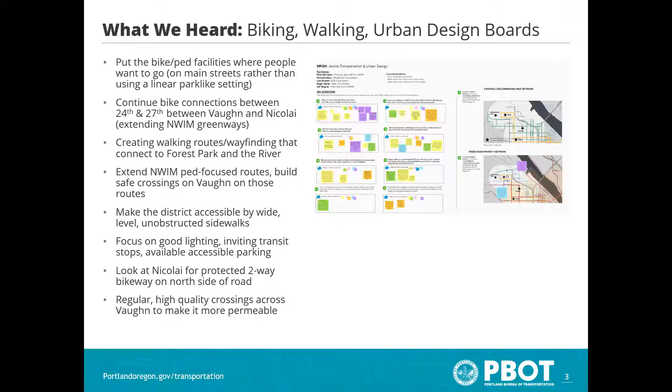So first, going back to the charrette in December - for those that attended, we asked some overarching questions, and then we had boards with the ability to comment on maps and all of that. We broke them up into different discussion groups, and the first one was about biking, walking, and urban design within the district.

Some of the overarching things we talked about and heard from those who attended about the bike-ped facilities is putting them where people want to go. So there was some talk about, should we have a Roosevelt that's kind of park-like, you know, separated where bikes and peds go?

And what we heard more is that people really want to be on main streets and access the uses there, rather than being tucked back in a separated setting.

Another thing we heard was the need to continue bike connections, extending the NWIM greenways. That's like 24th and 27th, identified in the Northwest in Motion Plan, making sure those continue up through the district as the main portals, particularly for bikes between Vaughn and Nicolai.

We heard a bit about creating walking routes and wayfinding that connect Forest Park and the river, an important element for people who live in the district, permeating between these two resources. We also heard about extending the NWIM pedestrian-focused routes and making sure we build safe crossings on Vaughn, particularly where peds are likely to enter the district.

We know that a lot of peds probably won't choose to cross Vaughn at 23rd because of the freeway portals. So if people are really walking up to 24th, 25th, or 27th, we need to make sure that's where we focus on better crossings where the peds will be circulating.

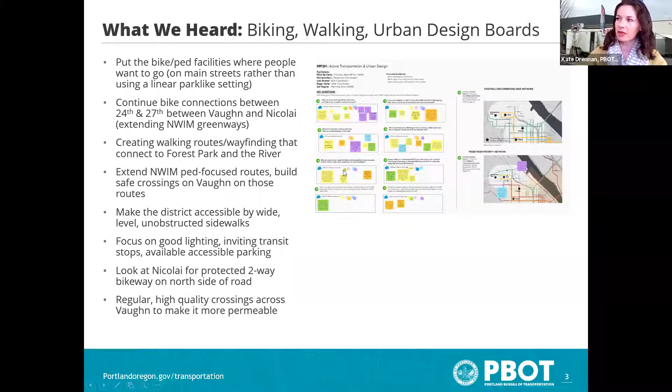These images are just some snapshots of the board from that day. We also had each group go into a discussion and then switch places.

And so we had a sub-chat about transit and vehicle flows. Some of the things we heard from you all were about making sure we incorporate TriMet's planned future services that are in their service enhancement plan.

Related to that, there isn't transit service down in the Squish right now, so we need to talk about that as part of this project. There were also some ideas about moving line 77 to Thurman to avoid the 23rd and Vaughn intersection.

There was discussion about the importance of integrating transit stops and end stations into the adjacent development, making them more placemaking rather than standalone, indefensible spaces that become a no man's land area.

We saw comments about wanting to see the streetcar parked on Wilson, with two-way connections and programming at Montgomery Park, again incorporating into the land uses in that area.

We talked about freight and how to encourage it not to use Vaughn, and instead try to get freight to use Nicolai and the on-ramps on Highway 30, and how we could better encourage that.

This relates to both transit and vehicle flow—23rd and Vaughn is a really tricky intersection. We have a lot of thoughts we'll get into about how to solve that, but some of the things we heard were exploring transit-only lanes or movements around 23rd and Vaughn, both northbound and southbound, exploring what it would look like if we took away vehicle movements in those areas and made them transit only.

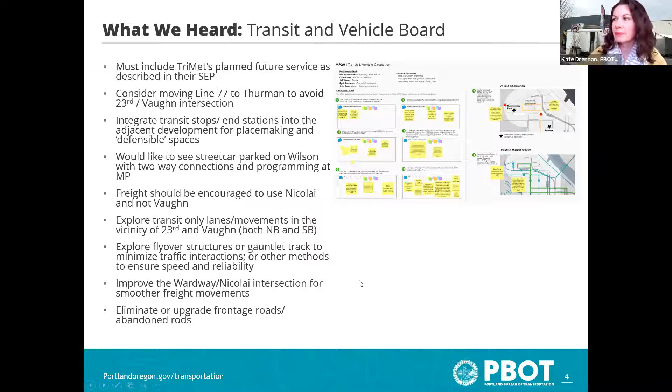With that said, I'm going to go through some of the slides on how we're thinking about each of these flows and portals. Like I said, we'll look at a slide, a map, and then the next slide we'll talk about some of the stickier issues related to each of these.

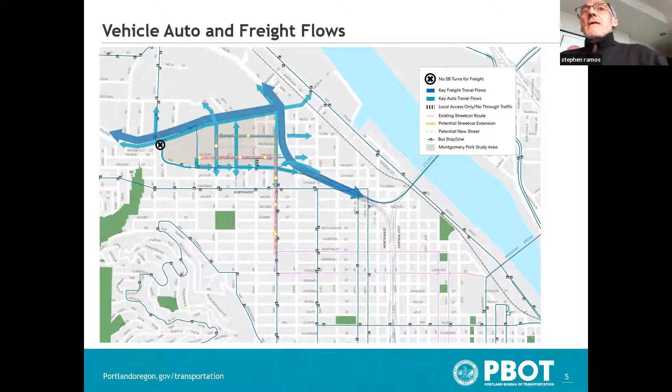My other point is kind of an overall point to Kate's presentation, and I apologize, I missed the very, very introduction. But my takeaway from this is that the overall issue we've been looking at is the congestion and constriction at the 23rd and Vaughn intersection, even before introduction of the streetcar. Then the introduction of the streetcar raised that to a higher priority, obviously.

And the responses, I think properly characterized them as interventions, essentially say, well, I hate to phrase it this way, but we were asked to look at what's the impact of the development and adding the streetcar to this intersection. And the responses are basically, well, get everything else out of the way — get the trucks and cars out of the way of the streetcar. And I'm not sure that's a very realistic response.

So I find it a little problematic because I don't think it actually solves the problem. Again, the cars and vehicles and trucks aren't just going to disappear — they don't evaporate. So those are my two points, one specific and one broad.

Thanks. I see Alex has her hand up as well. Yeah, thank you. I just kind of want to agree with what was said earlier.

I would be really interested in seeing the modeling and then thinking further ahead what mitigations might need to be done in the neighborhood. I know you're aware there'll be some work coming down the pipeline for Northwest in Motion, but how might things need to be changed? How might monitoring and evaluation be impacted by some of that?

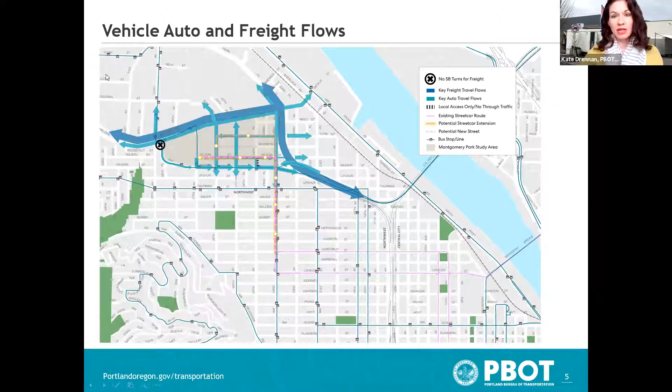Okay, I'm going to keep moving to our next slides so we can try to stay on time. Again, we can talk more about this.

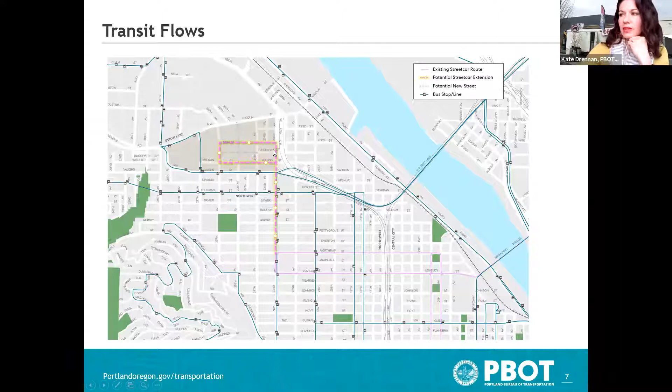With the comment board. So the transit flows, this is just really showing our existing bus lines as they operate. You can see that, as was brought up in the charrette, there aren't really any in the squish right now, and other than on 27th, most of the transit currently operates outside of the district. Then the streetcar, as we've mentioned, we're envisioning on Wilson and York, forming this loop. So some of the sticky issues we're thinking about for transit, a big one being the streetcar alignment within the ESCO site.

So we've been showing this York Wilson 26th Avenue loop as the best operationally. We heard in the charrette an interest in parking in front of Montgomery Park and integrating with the programming there. So something like potentially a loop with a tail track that goes up Wilson to 27th, or we saw comments with interest in a two-way in and out on Wilson.

These are all things we've done some initial streetcar engineering work on to see what's feasible. Some are more feasible than others in terms of cost and utilities, and some have more reliability issues than others, but it's something we're still exploring, along with modeling how these different alignments within ESCO or Montgomery Park area would impact traffic circulation and bike circulation in terms of limited right of way. So these are things we're looking into.

This new, or complementary, bus service plan for MP and ESCO gets to that comment we heard about integrating with TriMet's service area or service enhancement plan. Ideas like: do we continue line 77 on Northwest Thurman up further? Do we keep line 15 internal or external to the site? Do we want more overlap within the district, or more complementary service outside of it? Identifying future recommended bus lines into the squish is another issue.

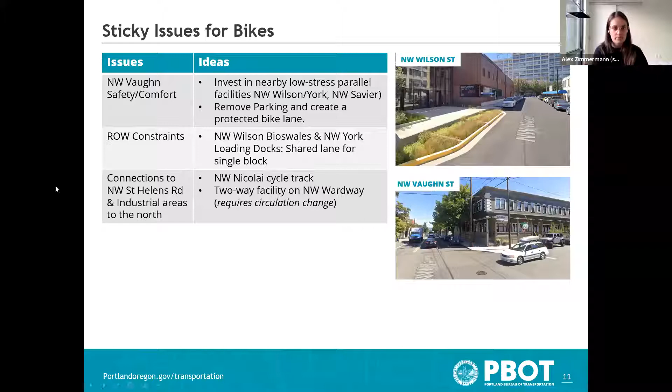Thank you. Kate, can you go back a slide or two? Yes, the facility design - so am I seeing that right, that it would be on Nicolai a buffered bike lane? Are we talking about a paint buffer? Then switching to a trail, so that would be a 2-way cycle track facility, or something similar? What would we be seeing in that area?

I think, and maybe Mike can answer this - is there a buffered lane today, or is that just based on the city recommended bikeway standard? So on Nicolai today there's this paved-over railway, and if you've been up there you've seen it. I think that has captured our imagination in terms of converting that to some kind of trail, like a 2-way cycle track experience. It's almost kind of just sitting there waiting for a modification. So we see that as a really good opportunity to provide a really high quality bike experience on an otherwise pretty busy freight street.

Were you asking further northwest, past why it doesn't extend all the way to Highway 30? Well, that, and also I'd be concerned about being on Front and then heading westbound on a bike with just a painted buffer, leaving that relative comfort of Front to go across to hopefully get to another comfortable facility. I'm surprised at the lack of protected bike lanes here, since we have a lot of really fast moving traffic in that area. Behavior will change eventually, but those are big roads, and we've had some fatal crashes in that area in the past 5 years or so.

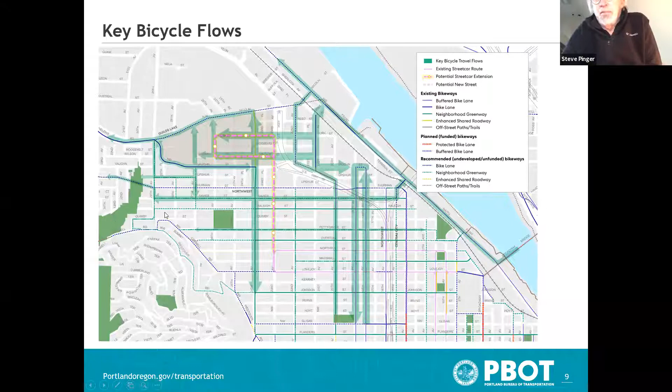That's all. Yeah, people could definitely turn off and go there, but this just seems like it's too much and too forced. I hear you. I think those are good points. As far as destinations, I think the flows are based mostly on destinations to St. John's Bridge and out to Sauvie Island, along Highway 30 in that direction. But those are pretty experienced riders that don't need a lot of protection, I don't think—you don't find occasional riders heading out that way. Yes, I understand your point.

All right, let's talk quickly about pedestrian flows and issues. Pedestrians we see are mostly less choosy—they walk all over the place, so you'll see a lot more of this. We try not to make pedestrians go out of their way since that's more work, so you see pedestrians on most of these streets. I think the exception is on 23rd at that freeway portal—we don't see there being a lot of pedestrians trying to cross at that point.

They certainly could, and we would have sidewalks, but ideally we would want people, if they're coming down 23rd to get into the district, to wiggle their way up on 24th to Greenway, or 25th, kind of all these other nice neighborhood portals off of Thurman or Upshur. We see people going to MacLeay Park within the district on all of these streets, northwest, north, south, and east, west.

You can see this little wiggle speaks to some of the plans that Montgomery Park has to have permeability in their site, with the potential bridge across Wardway to access MacLeay Park. That's something they're envisioning in their development. So that's kind of what that wiggle is, how we would get people there as one of the paths to the park.

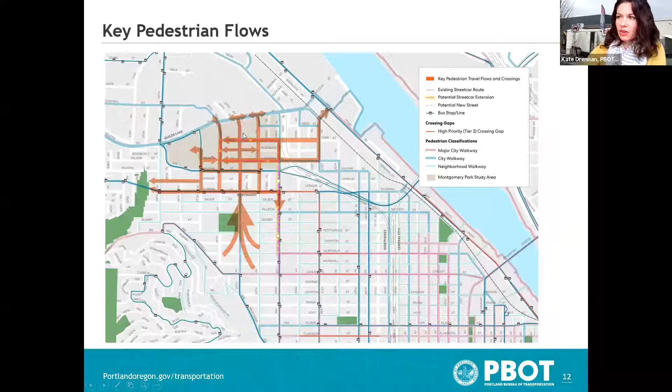So some of the sticky issues: what do we do with Northwest 23rd between Thurman and Wilson? If we want to emphasize 24th, 25th, and these other pedestrian portals, how do we get people to use those streets? Or do we focus improvements on 23rd in this area just on the west side of the street, since the east side has those freeway portal on-ramps and off-ramps?

For the Vaughn streetscape environment, we've heard a lot about wanting Vaughn to be a much more permeable street to tie the two districts together. So thinking about how we could add medians, curb extensions, street trees, or potentially more on-street parking, which would require moving the bike lane but might make the sidewalks feel more comfortable for walking. These are trade-offs, obviously, but things that could potentially both calm Vaughn and make it easier to cross.

The York loading dock is kind of an accessibility area. It's neat because we have this interesting urban design with these loading docks, and obviously it's pretty reminiscent of Northwest 13th. So is this something we'd want to preserve, to hold on to that history of the district and that uniqueness? But if we have accessibility issues in the area, do we then make a secondary walking space alongside that? Just kind of how we deal with the accessibility areas around that.

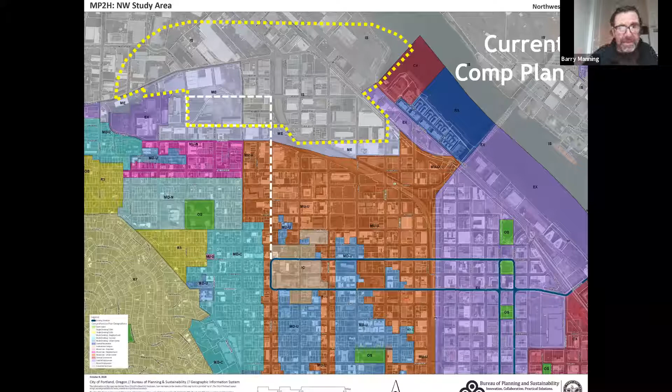As a reminder, this is the zoning pattern there, which is different than the comp plan. The zoning, particularly in the area we're looking at most intensely, which is west of Highway 30, has some heavy industrial zoning remaining on the former ESCO site. I don't think you guys can see my cursor, so maybe Kate can outline that. There we go. Former ESCO site and the areas to the north, some lower intensity general industrial to the east of that, right in that area.

Further to the west, there's Montgomery Park, which currently has an EXD zone and comprehensive plan designation. Then to the east of that, we have some areas, including the American Can Building and the area between Vaughn and Thurman, that are zoned EG1, which is an employment zone right now. So just refreshing you on that.

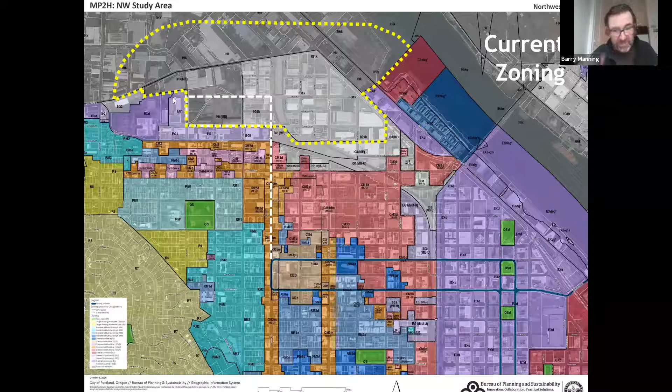Next slide. So as we get into the land use pieces, I'm just going to remind folks that we did have some implementation conditions that we talked about at the last meeting, that are kind of prerequisites, if you will, to some degree before we would move forward on land use changes. So the changes I'm going to be describing today are all kind of working towards completing a plan, understanding what the development regulations would look like, how we might zone it, but we really have some other steps we have to go through before we would actually act on that.

So for instance, Planning Commission may actually look at the regulations and consider this package, but before we go to City Council, we would certainly have to have some of these other issues addressed.

So first, west of Highway 30, we have the prime industrial land issue. We've got probably about 25 acres or so of area designated as prime industrial, that current city policy would suggest we need to either replace or find a way to mitigate to offset the impact and loss of that industrial land. So we're still looking at that. We talked about at our last meeting that there's an economic opportunities analysis underway right now that may change the dynamics and relationships of needs of industrial land.

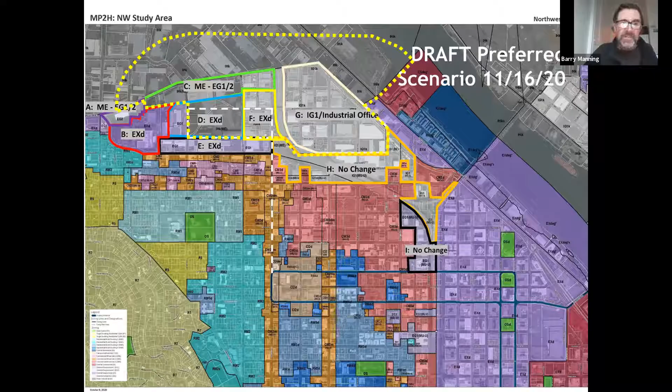So this map shows the areas that would actually be changing the comprehensive plan designation to facilitate and implement the project that we're talking about here. They're outlined in those dark lines, and as you can see, the Montgomery Park site is not identified for a zone change.

It's already zoned EX, but the area of the American Can Building, and the area between Vaughn and Thurman, would go from a mixed employment to an EX zone. The former ESCO site would also go from mixed employment to EX, central employment zone. And the area to the east of that would go from an industrial sanctuary to an EX zone or EX comp plan designation as well.

To the north along Nicolai, there are fewer changes. This area is already in a mixed employment designation, but up at the northeastern corner, that area is in industrial sanctuary, and that would go from industrial sanctuary to a mixed employment designation, maintaining that industrial or non-housing buffer adjacent to Nicolai.

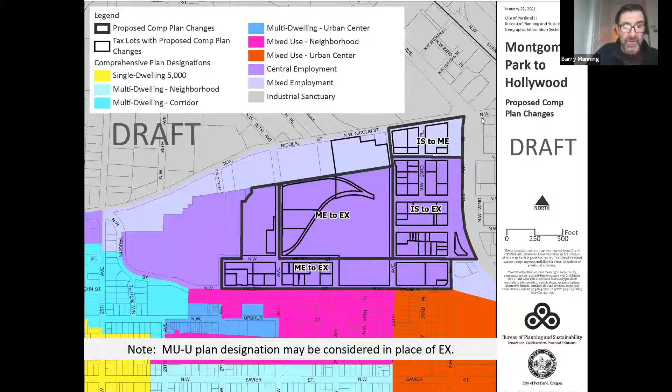This shows the zoning pattern that would likely be implemented with that comp plan approach. Starting with that buffer along Nicolai, we would propose to use an EG1 zone, most likely — a general employment zone. It would not include opportunity for housing, but it would allow office and a variety of industrial type uses, in keeping with what we talked about last time.

Further to the south, Montgomery Park is already EX, but the area of the former ESCO site would go from a heavy industrial zone to a central employment zone with a design overlay applied. The area to the east, more parcelized between 23rd and 24th, would also go from IG1 to an EXD zone. And south of that, between Vaughn and Wilson, we're also proposing to potentially use the EXD zone.

Before I leave these maps — you may not be able to see it on your screen, but I have a note there that we might consider using CM2 and CM3 mixed use zones in this area rather than EXD. They're very similar zones in terms of the scale of development we're anticipating. The reason we might consider the commercial mixed use zones rather than EX is that they were updated more significantly in the comprehensive plan, with new standards for ground floor windows, different types of setbacks, and other development standards more in keeping with an updated comp plan.

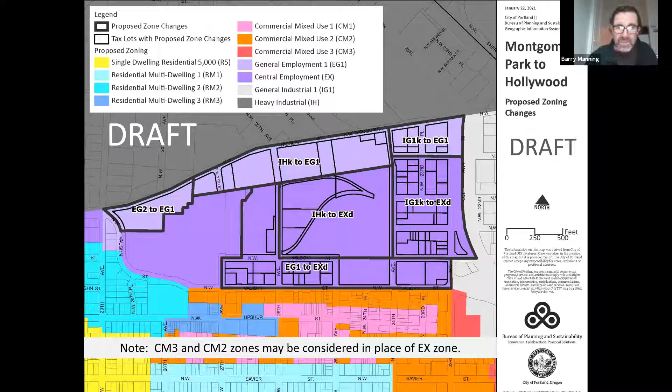Just to review, a couple of examples of what these zones look like and what intensity they are. EX, again, central employment, allows basically 65 feet of height by right. It's mostly oriented towards office and residential uses, but it does allow a variety of industrial uses, so any industrial firms out in that area would not be non-conforming — they would still be conforming, which is important, particularly to the industrial community.

The general employment zone 1 is a smaller scale zone, slightly. It would still allow anywhere from 45 to 65 feet of height, depending on how we code that. The big difference is it would not allow for any housing, so it's really much more of an office, employment, and industrial focused zone, and that would be applied along Nicolai.

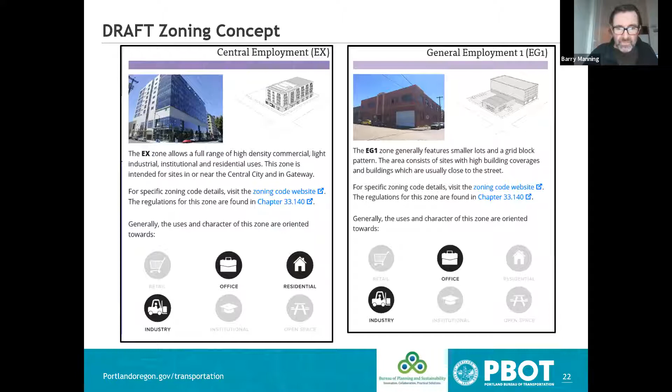I want to share the CM3 zone we're potentially considering. It's a large-scale mixed-use zone we've used extensively outside the central city throughout Portland, in areas previously zoned CX or EX. Northwest Portland has quite a bit of it. It's a fairly large-scale zone allowing 65 feet, basically a 6-story height limit by right. When housing is developed in CM3, you get an FAR bonus, like in the EX zone. But in CM3 you also get a bonus of 10 feet more in height, to get to that 7-story, 75-foot height limit that Tyler was discussing as a possible development type for this area.

So why don't we pause and look at the chat, and I can answer a couple questions if there are some. Barry, can you see the chat, or is it helpful if I just read the questions to you? It's more helpful if you read them. I can see it, but go ahead and read them to me.

Phil had a couple questions about brownfield mitigation, about how much of it is a public responsibility and whether brownfields have been mapped and responsibility assigned yet. I don't have a complete answer to that, Phil. I don't know that it's a public responsibility, but I don't have a complete answer. I don't know if Eric's with us today, he has more experience with brownfields. I don't think he is, but we can get back to you on that. I think it's a side topic, not really central to the planning process. I think it is a good question, though.

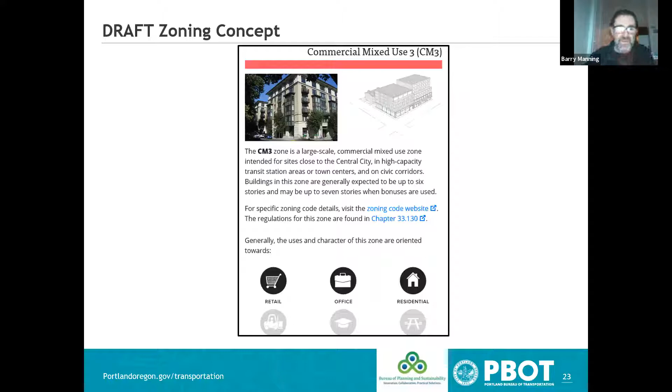Yeah, I know there was mention in the narrative around the draft recommended option we're looking at right now of 120 feet as a possibility. What can you provide, some context around that, or what that's about? I'm going to get into that in just a second, so if you can just hang onto that question, I'll talk about it. Yeah, you got it. So the next slide.

I'm going to show you some maps because we're planning to do a new plan district for this area. A plan district has regulations embedded in it specific to a certain geography. Guild's Lake, the industrial district to the north, has the Guild's Lake Industrial Plan District. The Northwest neighborhood has the Northwest Plan District, as many of you probably know. Our intent would be to create a new one for this specific area because it's kind of an amalgam of both Northwest and Guild's Lake areas. It seems somewhat unique.

Frankly, both of those plan districts have lots of provisions that wouldn't necessarily be entirely applicable here. So we'd have to do a lot of navigation trying to weave our way in and out of regulations that may or may not apply. So we think creating a new one is the cleanest way.

We still would need to amend some plan districts that apply in the area, and I'll show you a couple of those maps. We would probably need to amend the Guild's Lake Plan District boundary to exempt and take out the ESCO and adjacent industrial sites to the east of that. Montgomery Park is not in that plan district right now, so that's not an issue, but we would need to amend that boundary.

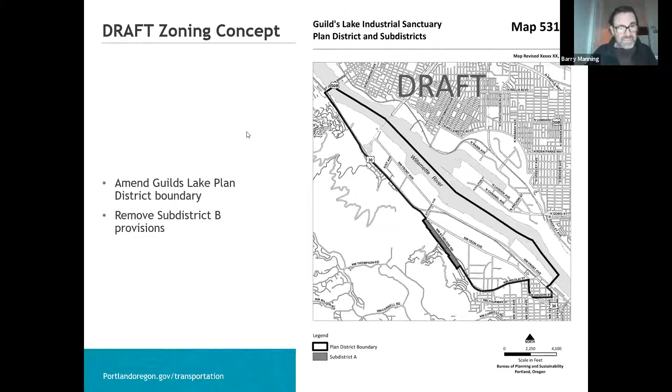Along with it, we would delete the sub-district B that's in the Guild's Lake Plan District because that would no longer apply either, and all of the text that relates to that would be deleted as well.

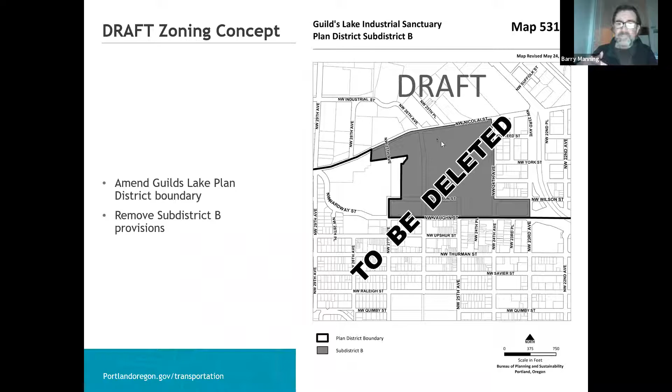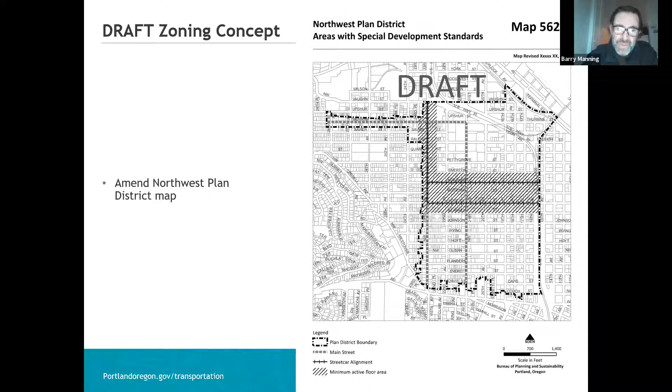In Northwest, we would most likely be amending map 562.7 in the Northwest Plan District to provide the same kind of regulatory framework along the streetcar alignment on 23rd that we have in the loop on Lovejoy and Northrup and on 23rd as it exists today. So really we're not necessarily seeing regulatory code changes, but definitely a map change to make this consistent.

So this is the new plan district. Right now we're just calling it the Vaughn-Nicolai Plan District, and the beauty of that name is that it's at the end of the alphabet of all the plan districts, so we don't have to renumber every single code to make it work. We would create a new plan district that would basically be north of Vaughn and south of Nicolai, encompassing all this area.

It would include a sub-district along Nicolai that would be a buffer. That area might include some regulations that limit office development, since office floor area is currently limited there. In the spirit of trying to maintain as much industrial land supply as possible and not run counter to that policy issue, we may maintain similar consistent regulations in place there for that band, but we're still working on that.

We would also theoretically apply a similar tool to this new plan district as we've applied to Northwest, which would apply active use development standards around the streetcar. Those could include things like minimum floor area and active building frontages adjacent to the streetcar line. We're still working on fine-tuning this. Obviously it needs some work because it's overlapping into that industrial area, or the employment buffer, if you will. So we'll be refining this map a little more, but that kind of concept would apply.

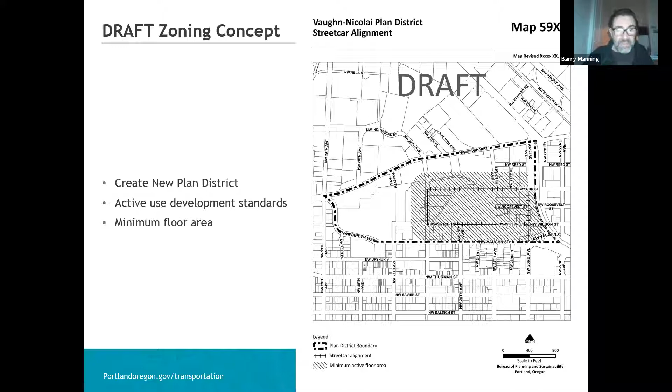This is just a list of some concepts we're thinking about applying, plucked out of some of the other plan districts nearby that have streetcar or high quality transit in them. We'd probably have some uses prohibited in this district, similar to Northwest—things like quick vehicle servicing, gas stations and Jiffy Lubes, self-service storage, outdoor recreation, potentially agriculture. Some uses might be limited in terms of size. Retail sales and service—maybe we don't want big box retail as an outright allowed use, so we might think about limiting the size of retail.

We also might think about the role of industrial uses in an evolving mixed-use neighborhood. Maybe we don't want to make them non-conforming, but we may not want to introduce large-scale industrial uses, and instead try to maintain a smaller scale.

In terms of floor area, if we use the EX base zone or the CM3, the base FAR is 3:1. Floor area, for those of you not following land use stuff, means the amount of building area relative to the amount of site area.

A floor area ratio of 1:1 means that on a 10,000 square foot lot, you could build a one-story building covering that entire lot, or a 10,000 square foot building. If you had a 2:1 FAR on a 10,000 square foot lot, you could build a two-story building equaling 20,000 square feet, and so on. Those are the FARs that the base zones have in them.

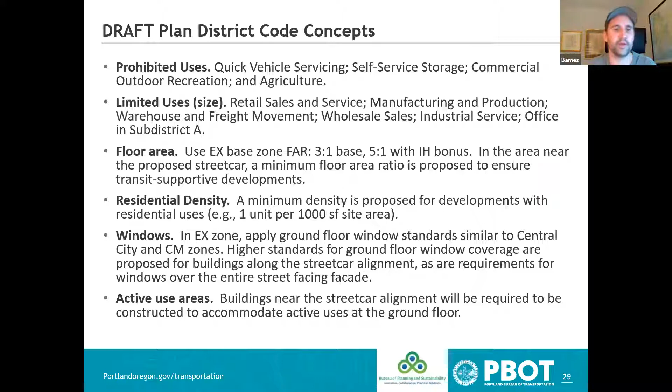Again, just want to talk about the higher height limit option here. If we use the EX zone or the CM3, it's very similar. The base height limit is 65 feet. We would have two kinds of height limit bonuses that we're talking about.

One is for inclusionary housing. So if your development triggers the inclusionary housing requirements, which is anything over 20 units, you would be entitled to go up an additional 10 feet, up to 75 feet. That's the same as what the CM3 zone currently has without any additional plan district provisions adding to that, so it's kind of a citywide standard. If we used EX, we think it makes a lot of sense to use that provision here as well.

It does, and we'll see this when the opportunities and challenges report comes out—it really makes the housing perform a lot better. We get quite a bit more affordable units this way, and it also increases the overall value that we might be able to capture for public benefit.

Now the planned development option is the one that Brian had asked about earlier, and this is something that's currently available in the mixed use zones and in the CM3 zone specifically. On a large site, if you're over 2 acres, you can ask for essentially a master plan.

You would go through the Portland Design Commission and present a master plan that includes site plans and massing, and request heights up to 120 feet. The purpose is that oftentimes on large sites that aren't broken up and parcelized, it's very difficult to utilize the floor area allowed within the 65 or 75 foot height limit. On a small lot it's much more feasible, but when you're up in 2+ acres it gets difficult because you have circulation internal to the site, or other requirements.